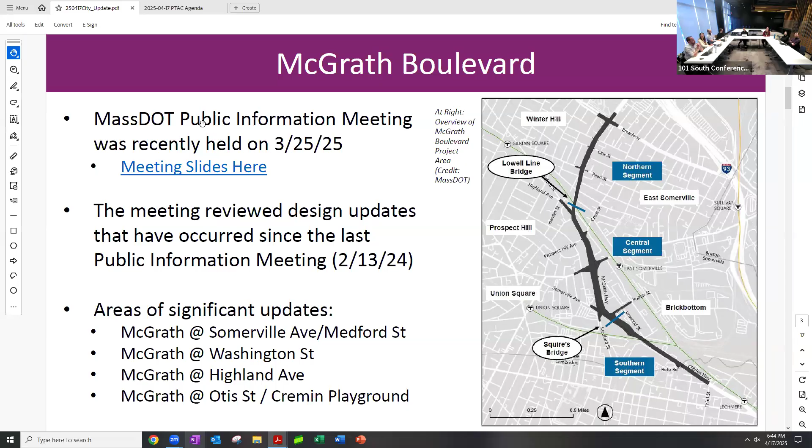What I'll cover tonight is McGrath at Somerville Ave / Medford Street, McGrath at Washington, McGrath at Highland, and McGrath at Otis Street with the pedestrian bridges. And then the intersections still under refinement: McGrath at Rufo Road, Prospect Hill Ave - apologies, I repeated that twice, that should say Pearl Street - and then McGrath at Broadway.

They've previously shown the whole corridor in concepts, but they sort of framed it as, we're still working on the next version of those intersections.

They also responded to a number of questions about specific design elements that there's been advocacy around. For raised crosswalks, what they said is they're limited to using it on side streets. There's been a push to have this at the at-grade crossings that are not at synchronized intersections, like the one at Cross Street. So far they're saying that they're not able to do that, although the city and community are still continuing to push for that.

A lot of people wrote in about the frontage roads, like Dana Street, just off at the very right of the image. They're also proposing a new one on the block between Washington and Somerville Ave, heading south, sort of between Washington Street and the Target, where there's the overpass - there's a frontage road today, and they're keeping a sort of local street there. Their response has generally been that they don't want people coming out of their driveways onto McGrath itself, and there's sort of local access to the smaller homes and businesses there.

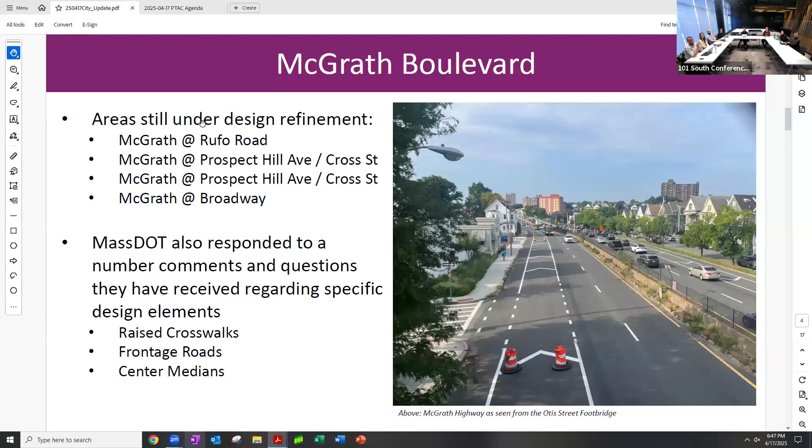So I'm going to go right into the 4 intersections, but it's not set in stone at any time. I'm just really going to cover what has changed. But if you have questions about what you're seeing or want to raise something else, just please interrupt me.

So this is McGrath at Somerville Ave, Medford Street. The major thing is that first call out on the top left: the slip road from Somerville to Medford removed. Previously there was a roadway connecting Somerville Ave to Medford Street. They've thankfully determined that isn't needed, and they're going to handle that move on Somerville Ave, on McGrath Highway itself.

If folks have been around for a while, they might remember the Union Square neighborhood plan proposed like a mini square here. This basically frames up what was proposed back then, teeing off Medford and Somerville Ave into McGrath, and then having a green space here. That plan actually had roads on all 4 sides of a very rectangular space, but I think we're very pleased that we've removed that extra space.

One of the trade-offs is you'll see there's a 6-lane cross section in that very short center block, because they're trying to accommodate a lot of people trying to get onto Medford, both from Somerville Ave and from McGrath itself. They also removed another lane northbound from McGrath onto Medford. That's not a move that exists today, so they don't plan to implement that.

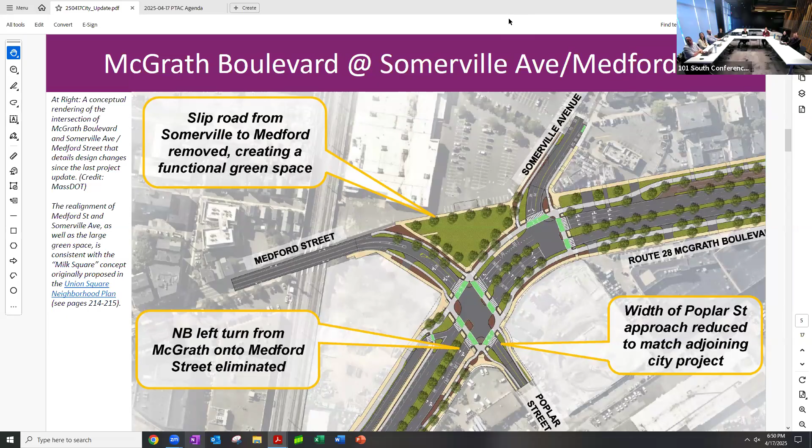Okay, so we're now moving 1 block north to McGrath Boulevard at Washington. Also some reallocation of space here. They've reduced the lane widths and widened the sidewalk and landscaping zone on this side of the street. On Washington in both directions, they removed a lane to narrow this roadway a bit. And then they're keeping this median, which is actually quite wide, about 22 feet. The MBTA has an interest in taking a left onto Washington Street.

So we're still figuring out what that means exactly, but that's preserving space to serve future bus routes. The bus network redesign has the 85 bus taking a left onto Washington Street. And you can see this tan color, that's the frontage road I was referring to. The light gray is two-way bike facilities on both sides of the street, and there's actually a two-way bike connection here up to the community path as well. They've got bus lanes, mostly heading westbound.

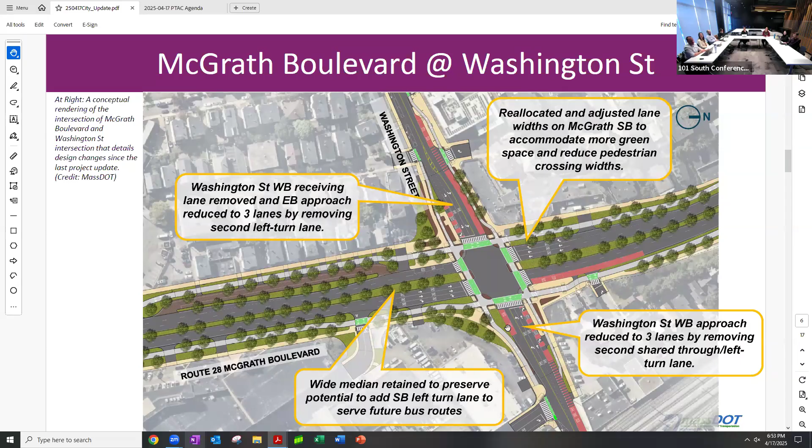Okay, moving north, another big block here. So we've skipped over Cross Street, Prospect Hill Ave, because we don't have a design update there. This is the intersection with Highland Medford. Again, they've removed lanes, McGrath northbound from 4 to 3, not a double left turn, a single left turn, and then therefore on the receiving side there's only a single lane. And then again, going out of Highland Medford there's no double right, single right. So the Highland Medford is actually 2 lanes smaller. McGrath is 1 lane smaller.

And then this is a somewhat confusing note to say that they think they could put Flexposts on the bridge. I think they're using evaluating because they're looking at other options too. It's very hard to put something structural on an existing bridge, but it sounds like they're at least going to be putting Flexposts to separate the bike facility there.

They've also trimmed up Highland and Medford. There's no sort of teeing off Medford into Highland Ave. Little mini plaza here. A lot less roadway, a lot more sidewalk space. And tying into a future Highland Ave with bike lanes in both directions.

In this case, do they have authority all the way over there, or are they going inside city's authority on this? This intersection is in Somerville's right of way. So do we agree with that? Like are they telling us what to do, or? I think they're taking their cues from what we envision for the future of Highland Ave.

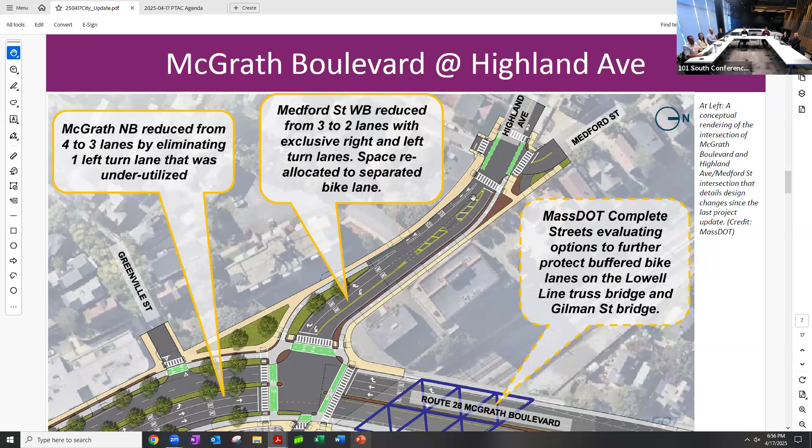All right, this last one we might spend a little more time on. So this is the existing pedestrian bridge. What you're looking at is the sort of magenta purple outline, that's the existing bridge today. And at the meeting, MassDOT made a pretty strong case for why they are proposing removing it and replacing it with an at-grade crossing. The blue is their estimation of what it would take to make the existing bridge ADA compliant. It's not ADA compliant now, it's too steep.

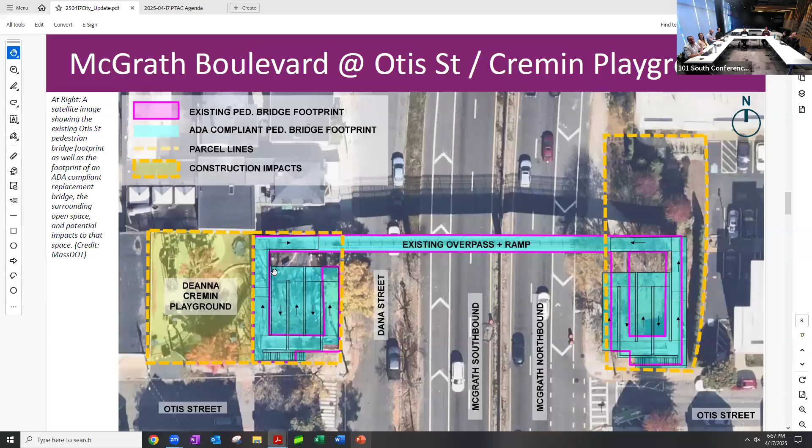So you need a lot more ramp space. This is part of the playground right now, so it would eat into the existing playground footprint. And it would also eat into the sort of passive green space across the street, which this parcel outline shows is a state real estate parcel. The city owns the playground itself. This half of it is the city, and MassDOT has the right of way on the other half. So they're trying to show you like a lot more ramps are needed, and then they sort of underline that with a rendering.

Right, so it's a fairly large structure. But this amount of ramps would still be cheaper than elevators, I assume. Or was that discussed? I'm not sure. Yeah, I don't think that was discussed. With elevators, one of the big challenges is who's going to maintain it. And also, if you have one elevator, you need two, one for when the other is undergoing maintenance. So we would probably need 4 elevators required.

A lot of right turns also. I mean, this is basically a bridge the same width as the existing one. This is not a bikeable structure, obviously, but it definitely would be ADA compliant.

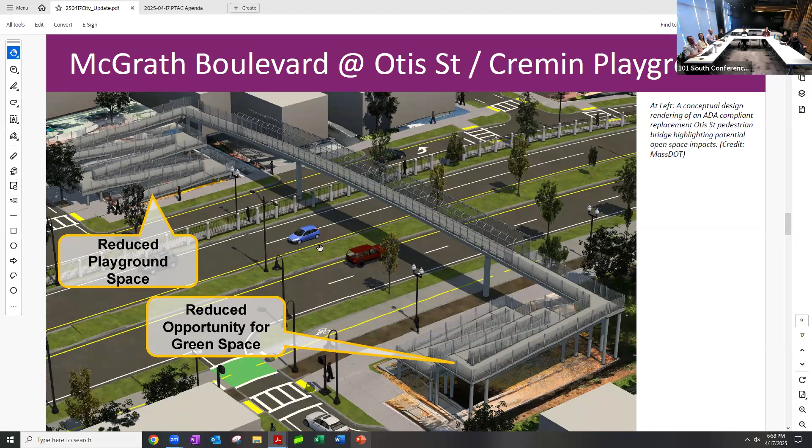And they're highlighting the reduced playground space as well. And after that, they presented what they are proposing, which is an at-grade crossing, a fully signalized intersection, and they were clear that that's a red, yellow, green light, not a pedestrian hybrid beacon.

They're showing the tie-in with our existing neighborway on Otis Street, and then they're envisioning that you could use the space to expand the playground, and then also there's an opportunity to create new green space over here. It is a green space, but there's no real facilities there or pathways or anything like that. It's just passive green space.

Just in the meeting, yeah. I think I remember them saying that they were limited in their ability to put in vertical speed calming interventions because of, I think, federal grant guidelines. I was wondering if you could expand on that.

I'm not sure specifically what they're citing, but it's a federally funded project, so there are more rules around design, following federal standards like AASHTO, the guidebook. Yes, in the presentation, it's written that's one of the reasons they can't do raised crossings. Right, yeah, I don't know specifically what they're saying. Maybe a question to ask.

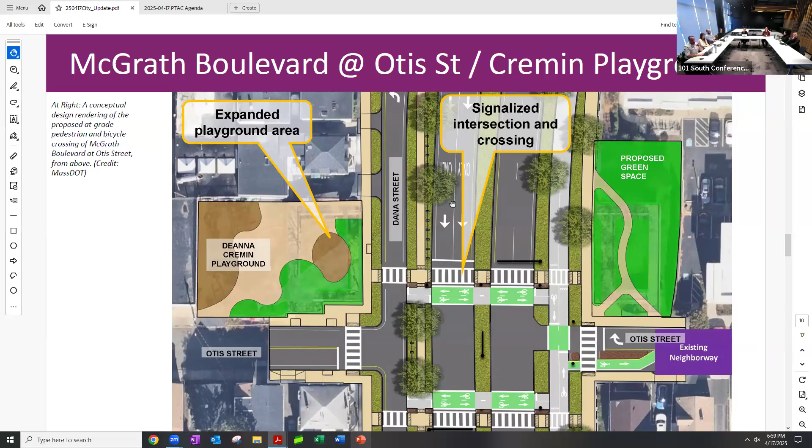And then again, they're underlining their point a little bit, that they show a rendering of the at-grade crossing. Can't vouch for any tree growth that may or may not be shown here, but I think they've made a strong case. They're pressing their case that this is the better plan than replacing the bridge, or trying to maintain it in its existing form.

And highlighting the fact it's a fully signalized intersection, right? All lots of street, human scale elements versus highway elements.

Does fully signalized mean that there's a signal like on the median too, in case you get stuck there? Well, there would be one visible from the median. I don't know if, yeah, they are showing one on the median. Oh, okay. Fully signalized means just like red, yellow, green.

And that it's an issue here because there's been pushback to the pedestrian hybrid beacon, which is the signal that's dark and then flashes yellow and then turns red. That's very confusing. We have a couple on Beacon Street, and there's concern that it's not respected, and if it's dark 50% of the time when you're driving, you get used to not realizing that you have to stop there. Otis is signalized too, the cross street coming out on one side, so they will get a green light to just take a right onto McGrath.

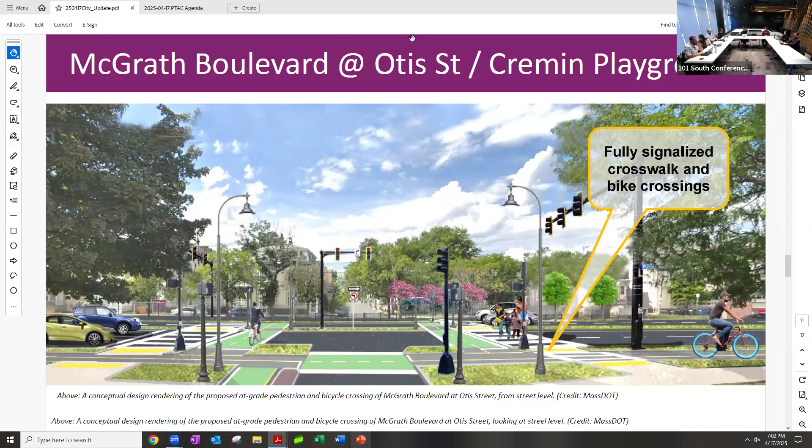So I'm just curious about folks' reactions to these updated plans. I'm just going to list a few things where I think we could integrate them into our letter, stuff that we've talked about previously, mostly just as a reminder for folks. But I think we could talk about the median, whether we feel like the current, the width varies in the current designs, as Justin noted.

But mostly it's 10 feet in width. We could talk about whether that feels appropriate to us, whether we still want to try to make it not be there. I personally feel like they've made a good case for why it should be there, but we can talk about that.

One thing that we have not talked about previously in our letter, but that came up at the meeting, is that they are planning on both creating new bus stops and improving existing bus stops. So we could advocate for what kind of amenities we would want to see at those bus stops. I did ask a question in the meeting about whether they were going to put in amenities, and they were like, yeah, probably, if you advocate for that. We were like, great, so we should do that.

Another comment came up at the meeting that I thought was interesting, where we could maybe advocate for the vehicle lanes to be narrowed from 11 feet to 10 feet to further encourage safe speeds. And then I think it would be great to talk about the footbridge and the crossing at Otis Street, since that was something that we advocated around. Previously, we had said that our ideal state would be to have a very safe at-grade crossing that does not require the bridge, but that we would want to see the bridge stay up throughout all of construction. So I think we should talk about what their new designs look like around there.

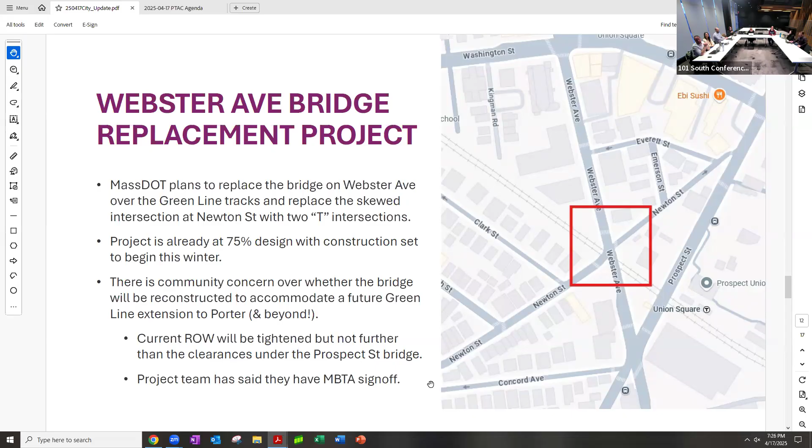So the question for the committee is, do we want to just send a letter saying, please make sure the Green Line can go under this bridge - it would be very sad if it couldn't? I think there's not a high likelihood that the design will change immensely, since it's already at 75% design, and I'm not sure if it's necessary for us to tell them to maintain that space under the bridge.

But I think if we wanted to cover all our bases and make sure that we are on the record saying please make sure to maintain this access and clearance for the train, then we could do so, just to be safe rather than sorry. So curious if anybody has thoughts on this project, or whether we want to do a small letter, probably 2 paragraphs.

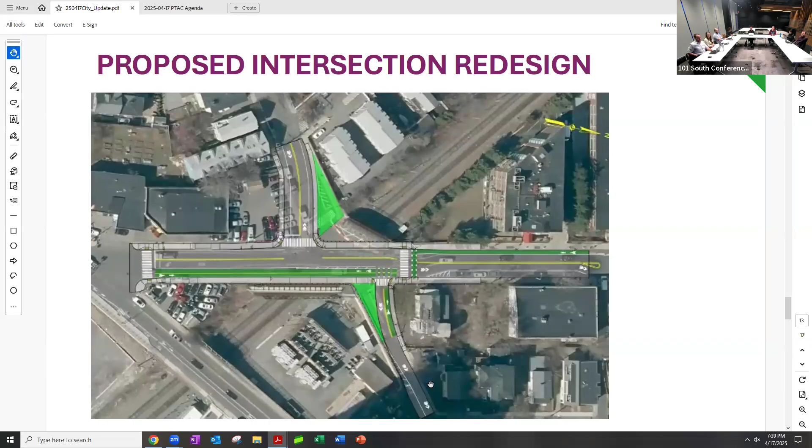Okay, our last agenda item is on the traffic signal phasing. That's part of the Elm Beacon Connector project, which we dug into at our last meeting, but we didn't get to really talk about the signal phasing. Thanks to Ted for advocating that we dig into it at this meeting. Are you taking this with you? I am. Cool.

I think we're all quite familiar with the overview, we talked about that a little bit more last time. But the higher level is protected bike lanes on both sides of Elm, between Russell Street and Somerville Ave, between Acadia Park, the city line and Somerville Ave and Elm Street, and then Beacon Street, that little section that wasn't finished before. We also are looking to make Mossland a new way by dead-ending the northern section.

Ted, to answer your question from last time, why the northern section versus the southern part that connects to Somerville Ave: the northern part is actually slightly wider. Last time I didn't have the full answer. It allows you to do the cul-de-sac and have a turnaround spot, which the section by Somerville Ave does not. There were also some impacts to signal timing, but I double checked that afterward because I wanted to make sure to share the answer with the wider group.

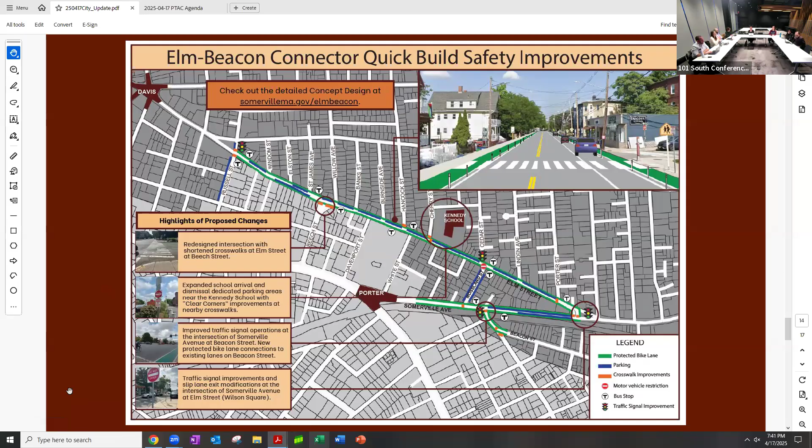I'll dig into the signal phasing, since that's what we didn't talk as much about last time. I'm just going to walk through the 3 major intersections, so if this is too long just let me know. On the whole, there are minimal changes expected at Elm and Cedar and Mossland, since the overall volume on each leg of the intersection is unlikely to change significantly.

During the first phase, eastbound and westbound Elm Street bikes and vehicles will get the green. Pedestrians will also have the walk sign to cross Cedar and Mossland. You'll notice that Mossland actually stays on the whole time. In the second phase, the walk sign will come on for all crosswalks at the intersection, and people on bikes will also be permitted to proceed through the intersection after yielding to pedestrians. During this third phase, southbound bikes and vehicles will get the green.

Right turning drivers must yield to cyclists before making the turn, and pedestrians will also have the walk sign to cross Cedar and Mossland. Any cyclists proceeding onto Mossland Street must yield to any pedestrians in the crosswalk. So in terms of signal phasing here, it works similar to how it does today, as I described.

Elm Street gets the green, then there's an exclusive pedestrian all-walk, and then Cedar gets the green. The biggest benefit will be for pedestrians using the crosswalk across Mossland Street, and cyclists traveling eastbound on Elm Street will be able to proceed through the intersection unimpeded, since cars will no longer be able to access Mossland Street from the intersection. This is based on the traffic counts, which are in that larger deck we provided last time, and also on the project website if you're interested.

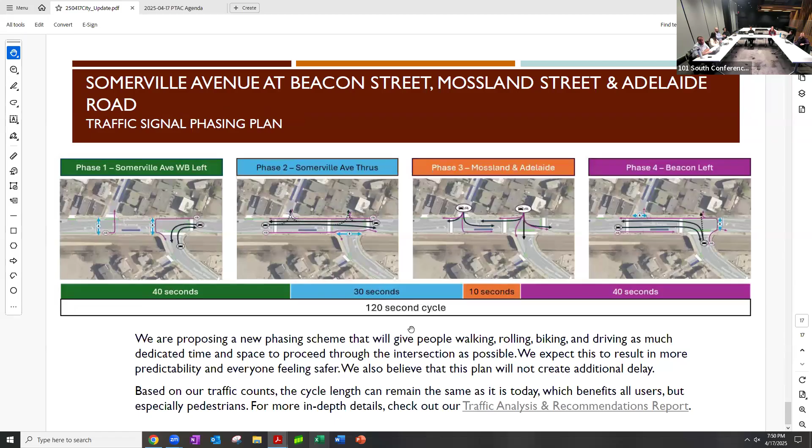Maybe I can open the comment. I was just curious about the bike and pedestrian interactions there, if it was considered having the bike lane do some sort of jog to be a little bit slower, going right and then left, rather than going straight along the right-hand side. If they were entering more towards the middle, where there'll already be some space for half of a fire truck at least, there'd already be a little bit of through space there that could potentially be used - someone would cross, take a small left and then a right. That could be hard for certain types of bikers, but it would slow people down and still get them out of the car's path. Maybe, I don't know, just curious.

Oh, thanks for sharing that.

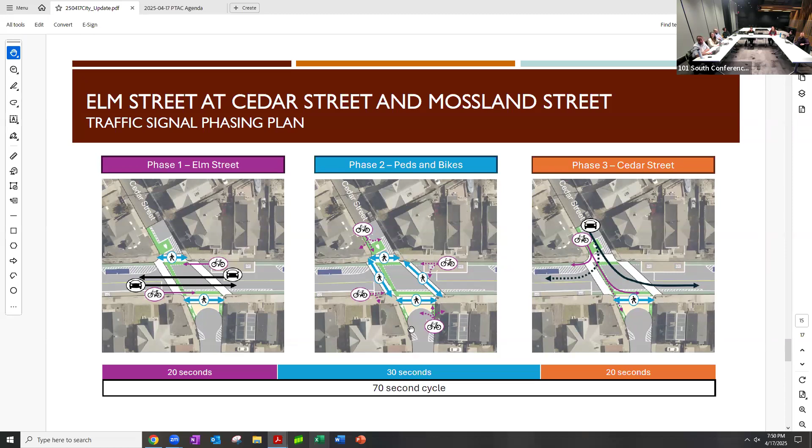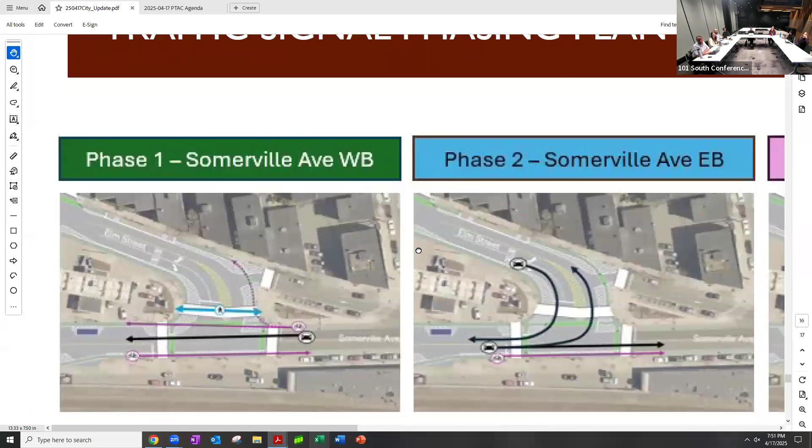Okay, so next I'm going to walk through this signal phasing proposal for Elm Street at Somerville Ave. This one has about five phases, so I'll talk about each one. Our plan will change the setup of the traffic signals at this intersection in a way that's intended to give people walking, rolling, biking, and driving as much dedicated time and space to proceed as possible.

During the first phase, westbound vehicles and bikes in both directions of Somerville Ave will have the green. Pedestrians will also have the walk sign to cross Elm Street, so any cyclist proceeding onto Elm Street must yield to pedestrians in the crosswalk. All right turns from Somerville Ave onto Elm Street will be required to use the slip lane, so they won't be taking that right directly where Elm Street and Somerville Ave meet - they'll be in the slip lane. So pedestrians and cyclists won't have to worry about cars turning right while they have a green or walk sign.

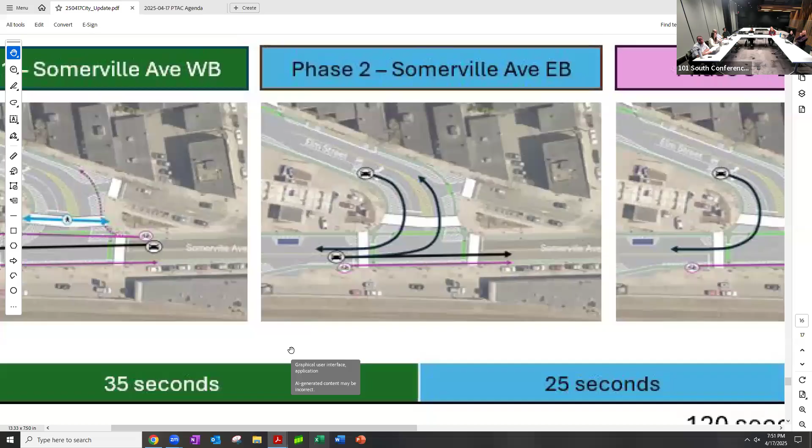During the second phase, eastbound vehicles and bikes will get the green on Somerville Ave. Right turns from Elm Street onto Somerville Ave will also be permitted. This phase can be shortened if there isn't much traffic heading eastbound. I just want to note that the right turn from Elm Street onto Somerville Ave is on a few of these phases, partly to accommodate the increased volume because Mossland Street would be closed.

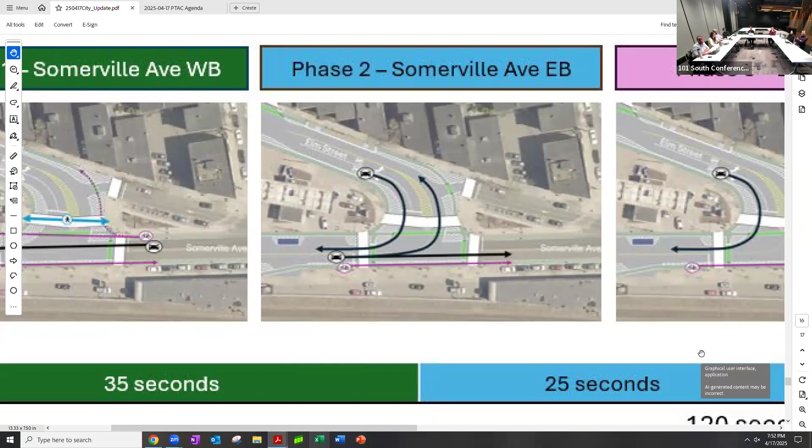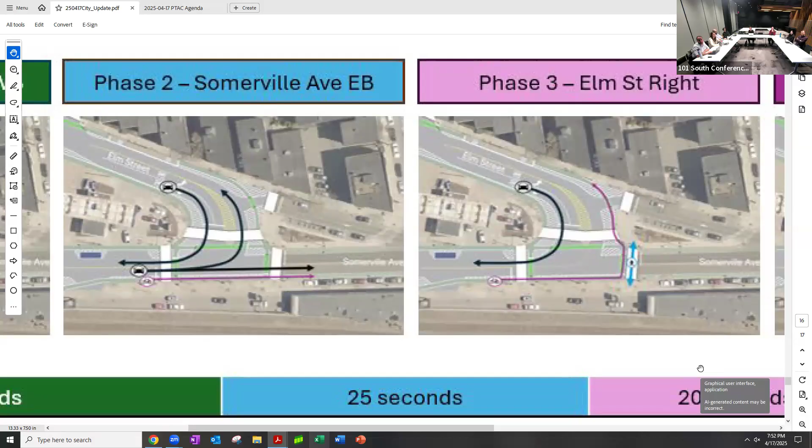During the third phase, right turns from Elm Street onto Somerville Ave will still have the green. Pedestrians will also have the walk sign to cross Somerville Ave on the east side of the intersection, and cyclists heading east on Somerville Ave will be able to take a left onto Elm Street.

During the fourth phase, all traffic on Elm Street will have a green light. Cyclists heading eastbound on Somerville Ave will also be allowed to proceed. This phase can be shortened if there isn't much traffic on Elm Street.

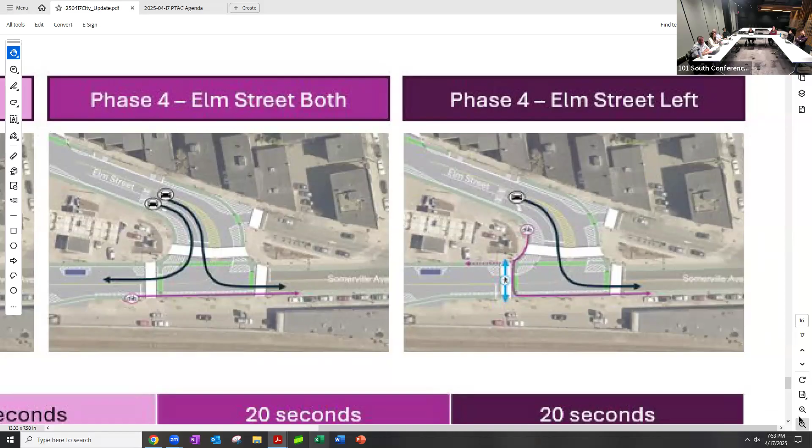And starting during the fifth and final phase, the Elm Street right turn lane will go red, but left turns from Elm Street onto Somerville Ave will still have a green. The walk sign across Somerville Ave on the west side of the intersection will turn on, and cyclists heading southbound on Elm Street will be able to take a left onto Somerville Ave. So we're really hoping this plan results in more predictability and everyone feeling safer. We're trying to reduce some of those conflicts.

Justin is more familiar, you can always speak to this, but these are attempts to have protected concurrent phasing. Is there a particular reason why Somerville Ave eastbound can't go in phase 1? Good question, I'm just thinking that through really fast. My apologies, I'm not the traffic engineer on the project team.

But I'm trying to do my best. The main reason is, so Kate just mentioned protecting - we've often debated exclusive phasing versus concurrent, where everyone's going straight at the same time and you have to yield. If you'll notice, there's no conflicts with pedestrians and turning vehicles, so it's a flavor of concurrent called protected concurrent. There's really very few conflicts at all between any modes. And then because there's no left turn lane on eastbound Somerville Ave, we can't let them go, because that's what it would do - you'd just hold it up. And there's really no space for adding a left turn lane there. It's not a parking thing, there's just not enough space.

So instead of having somebody who wants to take a left trying to go and holding up the traffic, it's just a red light, everybody's waiting. So there's less frustration. That's a thing, and that happens today. It's more that it would conflict with the pedestrian crossing, and I think in a world where we're removing the exclusive phasing, we have an opportunity to have every crosswalk not have conflicts. So I think that's the bigger issue.

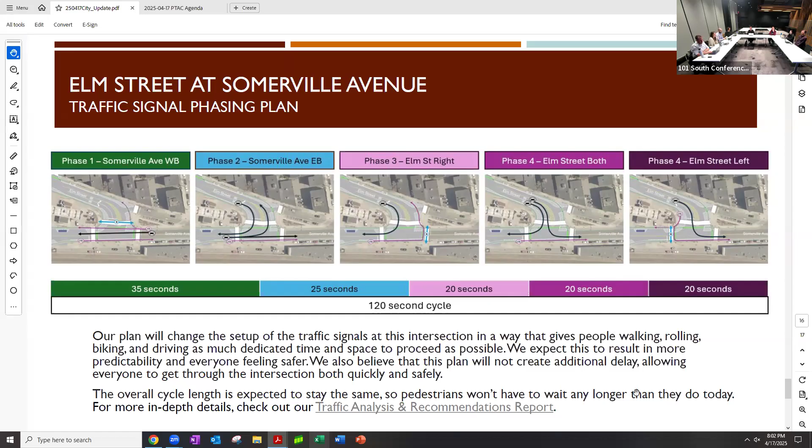Okay, should I do the last one? Yes, okay.

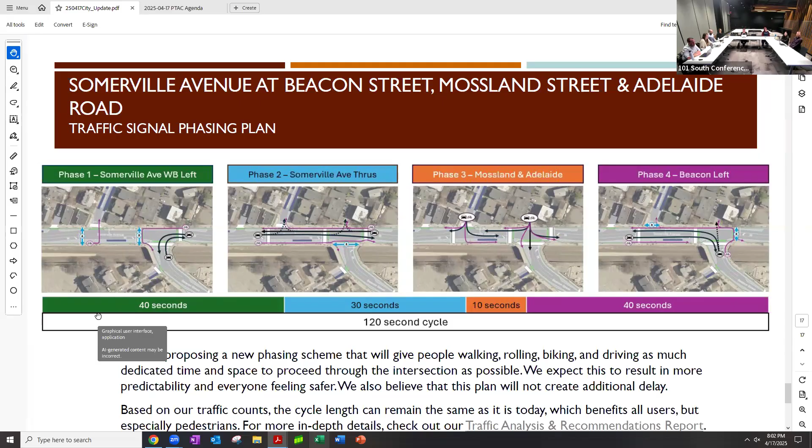So this one combines two intersections, right? If you're Mossland at Somerville Ave and Beacon at Somerville Ave, think of these as all one. During the first phase, the left turn from Somerville Ave onto Beacon and the right turn from Beacon for motor vehicles will both be green. Cyclists will also be able to turn from Somerville Ave heading westbound onto Beacon, and from Somerville Ave heading eastbound onto Mossland. So the crosswalks across Somerville Ave at Mossland Street and on the west side of Beacon Street will have the walk sign. Currently these are exclusive, and we just heard a lot about red light running in this area, so we're trying to change that to reduce conflict.

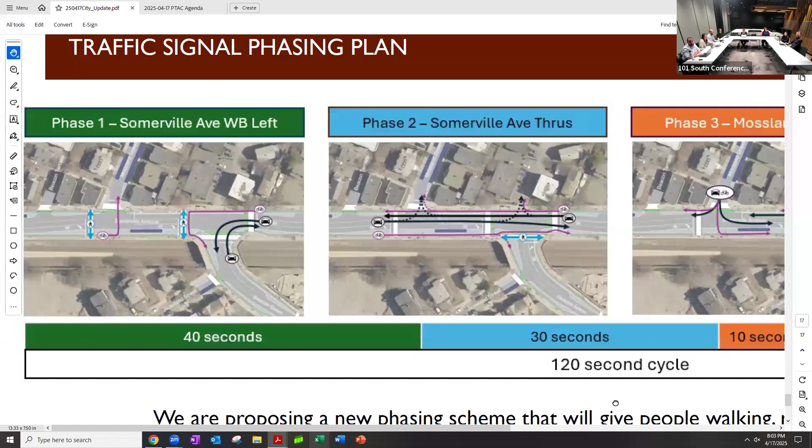During the second phase, drivers proceeding straight along Somerville Ave in either direction will have the green. Drivers will also be permitted to turn onto Mossland Street or Adelaide Road after yielding to oncoming traffic. Cyclists and pedestrians will also be able to proceed straight in either direction along Somerville Ave, and cyclists can also turn right onto Beacon, Mossland, or Adelaide after yielding to pedestrians. Pedestrians will have the walk sign for the crosswalk across Beacon.

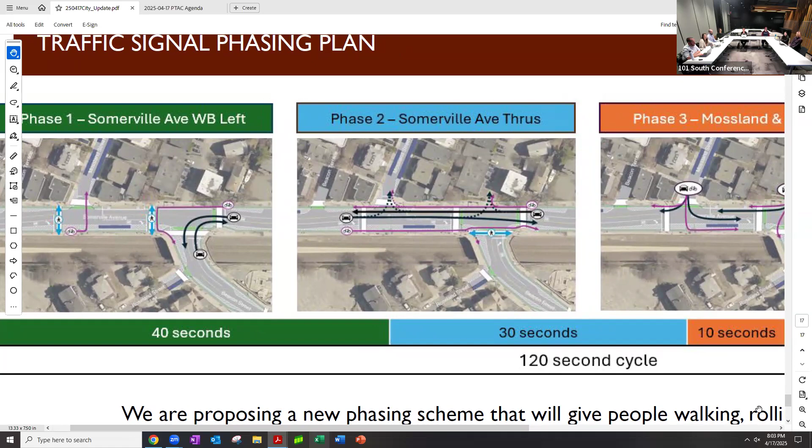During the third phase, cyclists and drivers waiting at either Mossland Street or Adelaide Road will both get the green. Anyone taking a right out of Adelaide or left out of Mossland will have a red light on Somerville Ave until the start of the next phase. We intend to install camera detection at these intersections, which will allow this phase to be skipped if there are no vehicles or bikes waiting to exit Mossland or Adelaide.

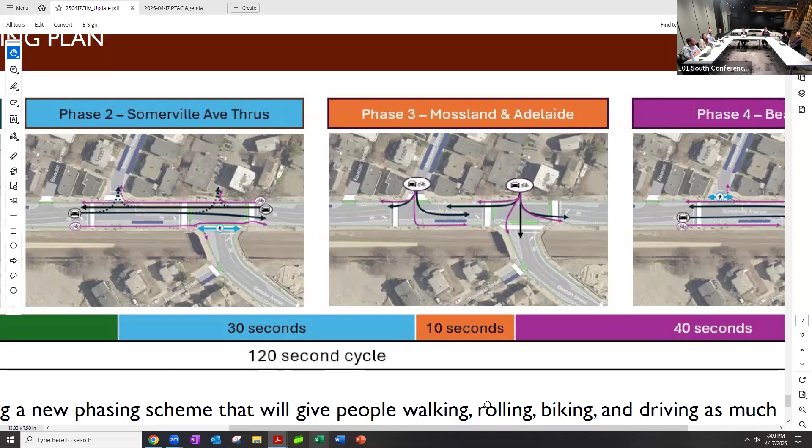During the fourth phase, drivers turning left from Beacon Street onto Somerville Ave or right from Somerville Ave onto Beacon Street will get a green. Traffic bound for Adelaide Road from Beacon Street will also be permitted to proceed to the intersection after yielding to cyclists. Cyclists will be able to proceed in any direction from Beacon Street and will also have a green on Somerville Ave heading eastbound, primarily intended to allow cyclists wishing to turn left onto Mossland Street to position themselves to proceed during the next phase.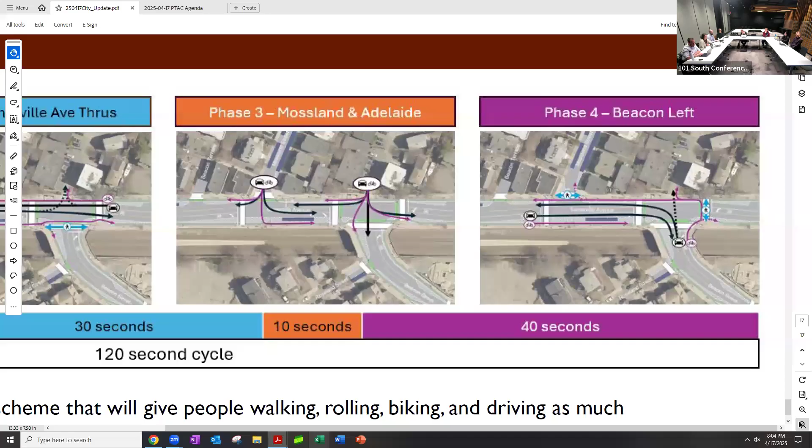Pedestrians will have the walk sign across the crosswalk on Somerville Ave on the east side of Beacon and the crosswalk across Mossland Street. We hope this plan results in more predictability and everyone feeling safer, and we intend to keep the cycle length the same as today to ensure pedestrians don't have to wait longer. We also feel people driving or biking will be able to move more quickly through these intersections than they do today without compromising on safety.

So is that my impression, or on phase 4, bikes are going around, right? They're going to go close to the crosswalk first. Yeah, instead of that, I can't see that happening in practice. Yeah, we are hoping to create more dedicated spots so it's clear where you can go as a bike. We will also have bike signals. But instead of traveling either with the vehicles, or what we also see, a lot of bikes taking the left from Beacon onto Somerville Ave to head to Porter Square.

They're just going on the pedestrian phase, on the exclusive ped. Right, so this would be creating dedicated space, they will take a right to cross, then take a left. Or they just go straight. Yes, which would be with the vehicles. Yeah.

Which we heard a lot of people also have discomfort in doing this when we did outreach, as a cyclist. Yeah, okay. So again, this is just what we heard, that if you were waiting to take a left, you're feeling unsafe to move with the motor vehicles. So then you go on the exclusive ped, since you feel so much discomfort taking that left with motor vehicles, even when you're in that box, if it isn't clustered with vehicles.

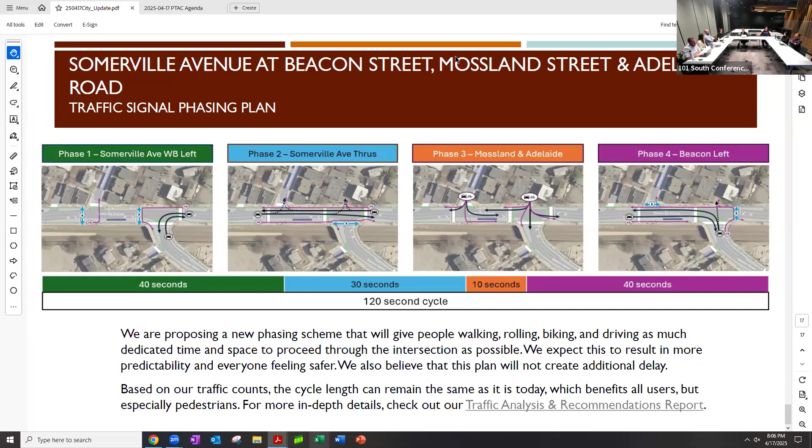Okay, well, in the interest of not keeping people here far past dinner time, thank you all so much for being here. I saw you vigorously taking notes, Kate. Is that an appropriate way? Do you need anything more official from us?

No, whatever works best for you, but again, if there are additional thoughts, please let us know. Especially in this signal time, we are trying to get all that feedback as soon as possible, but we are still exploring what are the specific solutions, so please don't hesitate to reach out with additional thoughts.